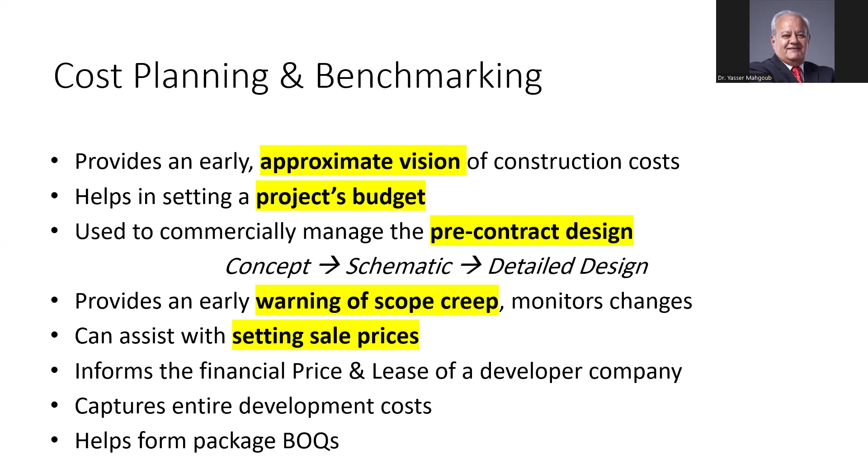It provides a warning of scope creep, monitors changes for the project. But it can also assist the real estate company to understand how to estimate the prices, the leasing contracts in the beginning of the project. So it is a very important number that you provide, and you have to understand how to work on this estimation.

So the first method we use is called benchmarking. Benchmarking means that you relate the cost of the project based on the examples of other projects. For example, when you design hospitals, the benchmarking would be the bed. It will be per bed. The hotel, it will be per key, the room key, not the number of occupants; it will be by the room key, the number of rooms.

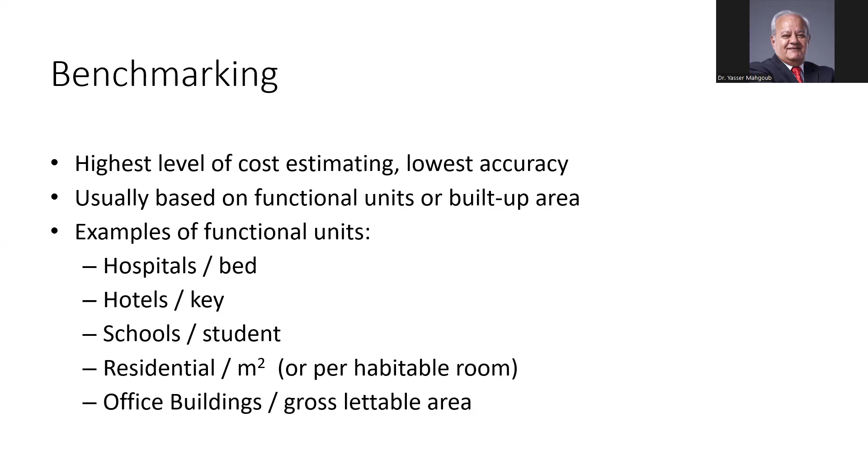For the schools, it is usually by student. For the residential projects, it's usually by meter square. For office buildings, it will be the gross lettable area, not the whole area, the lettable area. So if you have a project that has mixed functions, you have to estimate each function individually and provide an overall cost estimate.

The cost plan, as we progress, starts to have more accuracy. During the preliminary cost estimate, we expect 25 to 30% tolerance, so it is up or down 25 to 30%. During the concept plan, the accuracy will be more, so the tolerance will be plus or minus 15 to 25%. When you finish the schematic design, the first project, the tolerance will be less, 10 to 15%. When you have detailed plans and working drawings and bills of quantities, the estimate can be up or down 5 or 10%. So the accuracy increases as the design progresses.

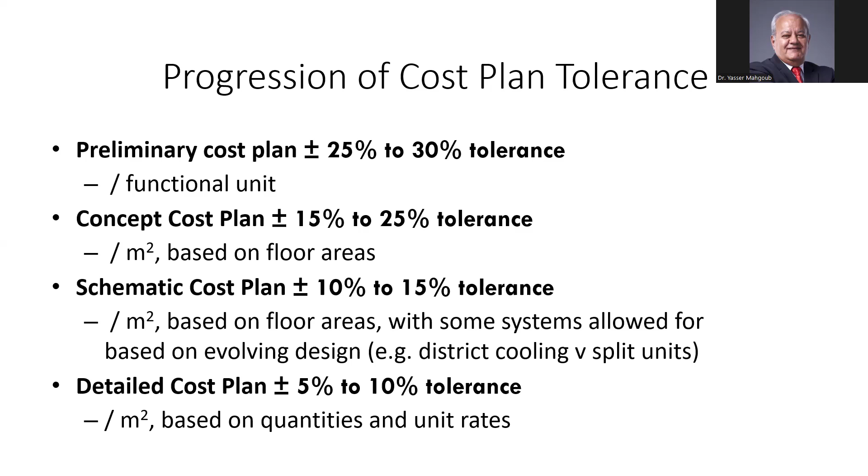The real cost estimate will be the cost provided by the contractor according to the tender documents. Yet, this might not be the final cost of the project because there might be variation orders or additional work required or obstructions during the construction that might delay or change the cost of some items. So even during the construction, the cost might continue to change according to the progress of work. So beginning with a high-level benchmark estimate by function is a good beginning that allows the architect and the owner to understand the scope of the cost.

You need to do some adjustments according to some major items like the geographical variation. If your project is in Siwa or in Aswan or in Hurghada, it would be different than projects in Cairo or Alexandria or major urban areas because the distance, the availability of materials, the availability of workmanship will affect the cost of your project. You need to provide accommodation for the workers. You need to provide water for the site work. You need to provide materials, transportation, and all that adds to the cost of the project.

So you need to think about a multiplier that is a function of the units in order to accommodate for the changes in the cost. You also need to add contingencies, like 10% contingency to the cost, in order to accommodate for any changes or delays.

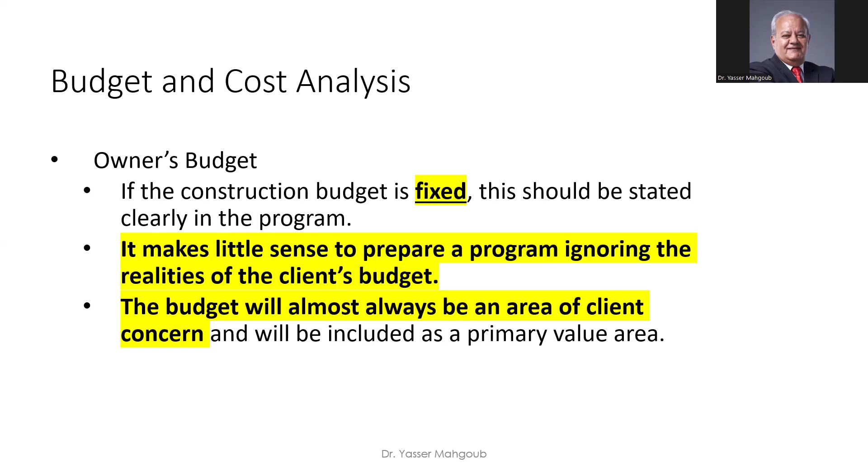Clients usually talk about the budget and the cost before they talk about the design. It's very critical for them to see that you are concerned about the budget and you have the knowledge to provide a good cost estimate for the project. Usually clients are over optimistic, and they think that with the little money they have, they can do everything. The architect's role is to correct this view and make them understand how much what they are asking for will actually cost, because there are many items that they don't understand and don't consider when they think about the budget.

Of course, the cost changes with the building type and the building quality. A 5-star hotel is very different than a 3-star hotel or a 1-star hotel. A resort on the coastal area is different than an upgrade of a project in a historical area, which is different than a neighborhood design in a desert or outside the city. So this will extremely impact the cost of the project.

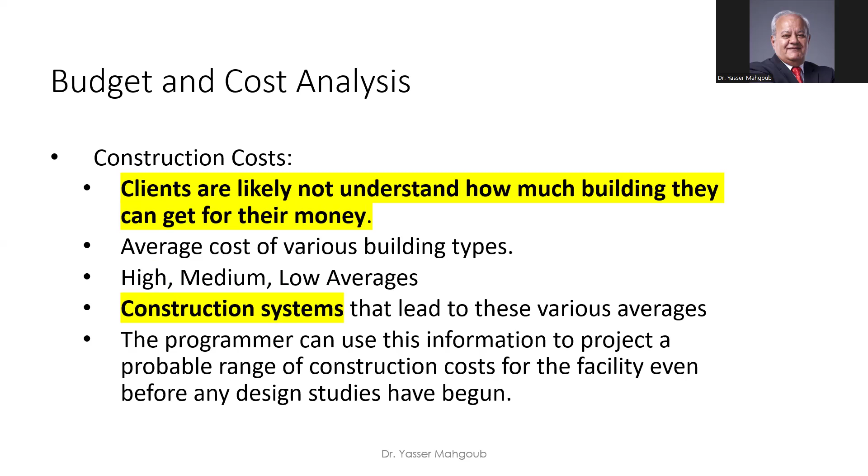And it's very wise to confront this issue from the beginning of the project, so you know if it's a go or no. Don't waste your time and effort on something that is not going to continue. So from the beginning, the client knows what the budget is. Do they accept it or not? Should I go ahead and start the program or not? So don't start without having all these variables clear to you from the very early stage.

And as I told you, the first question the client will ask you is how much will it cost? Not how will you design it, or what style are you using. They don't care much about this. This comes second after the cost. So having cost estimation skills through workshops, through training, through personal study is a very wise step.

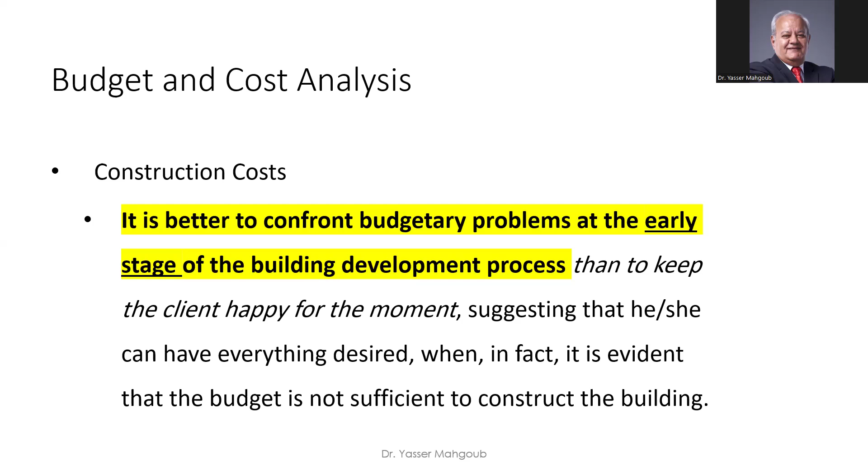We need to understand the difference between construction cost and project cost. The project cost is not the construction cost. The project cost is more than the construction cost. The construction cost is just one part of it. Other items include the land price, the cost of providing infrastructure, the cost of issuing permits, inspections, insurance. All these are parts of the project cost.

The soil tests, this has to be paid by the client. The contour lines, the topography, surveys, this has to be provided. Archaeological surveys, if you have some historical elements in the site, you need to make sure that they will not stop the work. The feasibility study is done by an economist. The lawyer who is going to review the contracts.

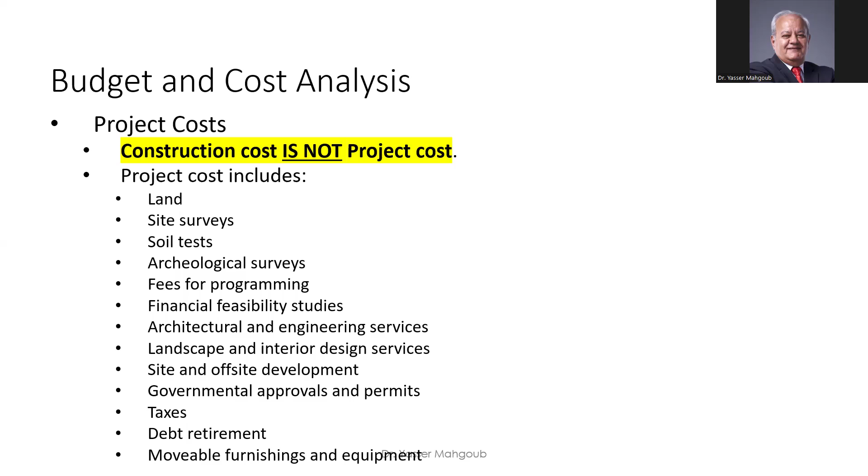So building cost is one part of the items. Fixed equipment, site development. So this is the total construction cost. Then you add to it the site acquisition, movable equipment, professional fees. Your fees are not part of the construction cost. They are part of the project cost.

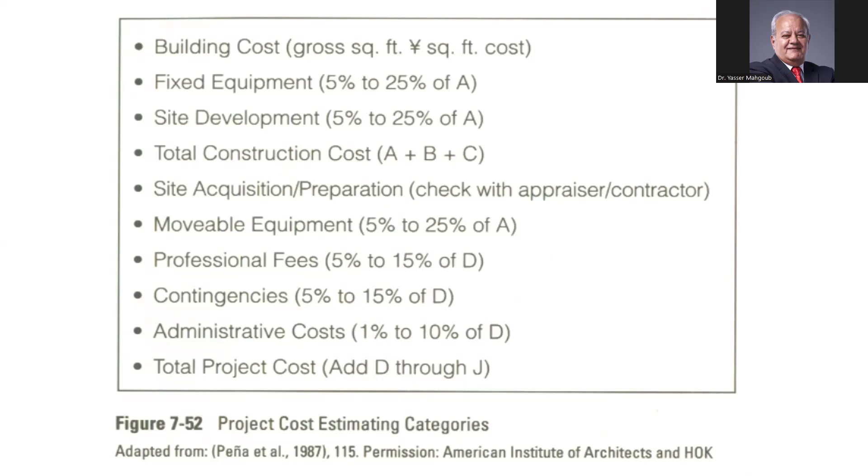Contingencies, 5 to 15%, depending on the site location and the type of the project. Administrative cost, if you are going to hire a project manager. So for the total project cost, you need to add all these items to the cost of the construction. This is not commonly understood by the client.

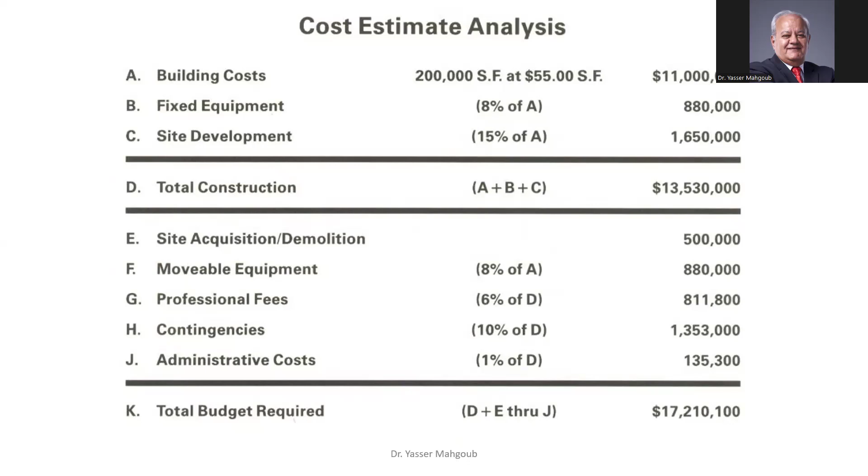So the architect must provide them with a cost estimate analysis: the building, the fixed equipment, and the total construction, and what will be added, and see the difference between the construction, 13 million, and the complete cost, which is 17 million.

One interesting item related to the design is that the shapes of your spaces affect the cost. Assume that you have a requirement in the program to provide 100 square meters for an item. The shape of the plan makes a big difference because the area might be the same, but the perimeter will be different. And the perimeter affects the cables, the electricity, and the skirting. Anything that is per meter run will be affected. Per square meter will not be affected.

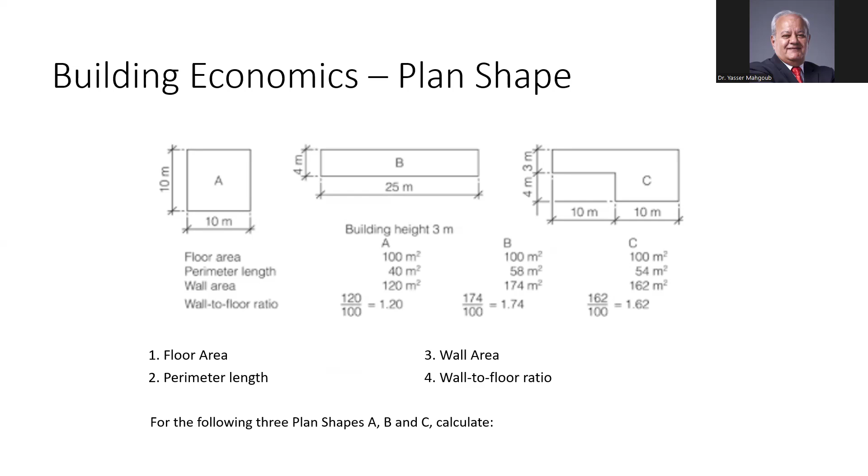The wall area will be different according to the shape. So the wall to floor ratio will be different according to the change of the shape. So this is also something that you need to consider in your design. Here we have a 1.2 ratio. B, we have a 1.74 ratio, and C is a 1.62 ratio. And that affects the cost of the materials, the painting, the cabling, everything that is related to the meter run. So the shape that you select for your design affects the cost of the project.

The height of the building is another major variable that affects the cost. The higher you go, you need to think about how materials will be moved from the ground level to the 30th floor. What types of cranes will you need? How will you get the concrete mixture to that 30th floor? How will you get the workers up and down? The safety requirements. So the higher the building, the more cost.

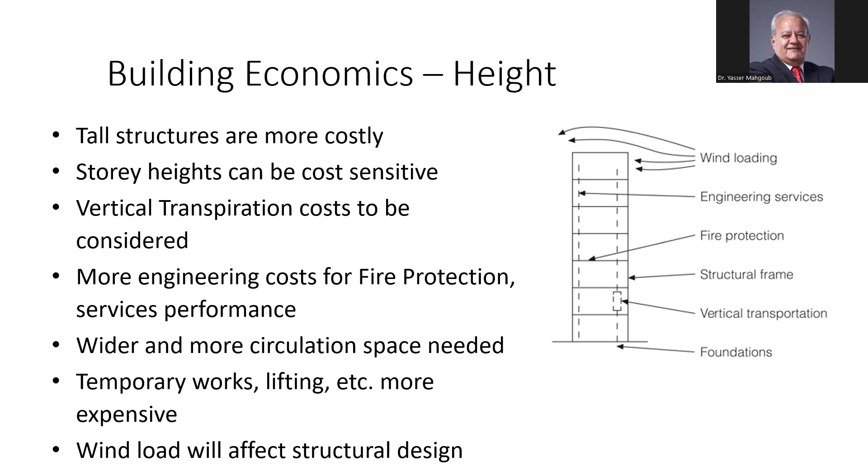You will need vertical transportation, more foundation, a stronger structural frame, fire protection, services, and also accommodate the wind loads that will affect the structural system itself. And that will increase the cost of the construction. So all design decisions affect the cost of the project.

So cost planning, as we said, has a set budget. You go through the concept, the schematic design, the detail, and the cost planning becomes more accurate as we proceed. To adjust the cost, sometimes we do value engineering.

Value engineering is a type of activity of workshops that involve the client, the architect, the contractor or subcontractors, if available, and the users, and they discuss ways to improve the quality while decreasing the cost. So it's not only targeting the decrease of cost, it targets keeping the quality or improving it while reducing the cost. And there are many places that offer value engineering certificates, and I think this is also a good step ahead to have these types of certificates.

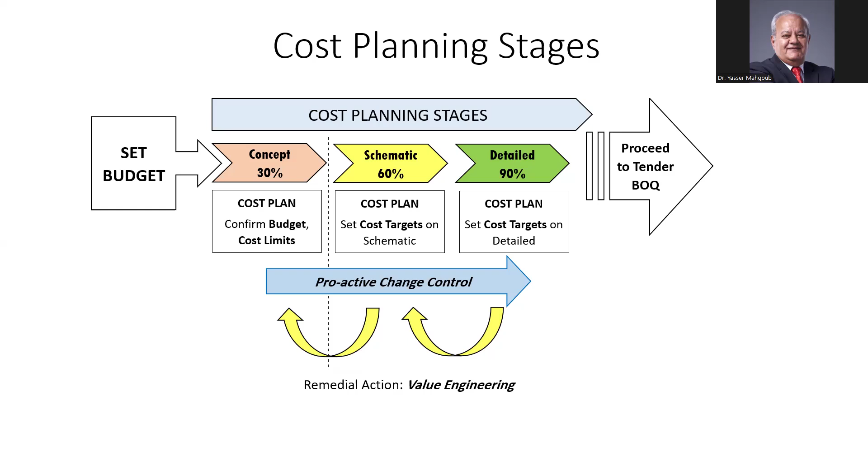So these are two areas that I think are very good for you to pursue in the future: value engineering and life cycle cost analysis. They are very important. They target the cost, they target the design, the materials, and they provide professional feedback, not subjective feedback. So the quantity surveyor also has a role when deciding on the quantities of the project, that the quantity and quality defined in the quantity surveying and the specifications affect the cost.

And this triangle shows the relationship between the quality, the time, and the cost of the project. They all work together according to the relationship of the triangle. Cost divided by quality and time. Quality by time equals cost, and so forth. So they are all related, and you need to consider. And from the beginning of the project, no money, no project. You have to make sure that the client has the required budget for the project.

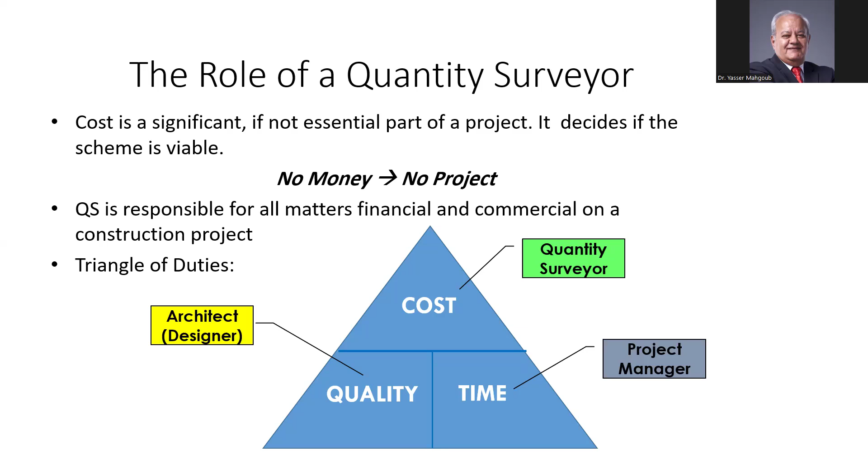So time is controlled by the project manager. Cost is controlled by the quantity surveyor, and quality is controlled by the architect. And the three of them must work together. You cannot decide everything alone. You have to work with others.

In conclusion of this cost management or cost estimation, benchmarking is very critical, and it is updated yearly. Every year, and sometimes every month, there is a newsletter about the benchmarking according to the company. Cost plans are approximate, not accurate. Accuracy improves as design develops. Building shape, size, and arrangement all affect cost. Height, room shapes, sizes, ceiling height, all these affect the cost greatly.

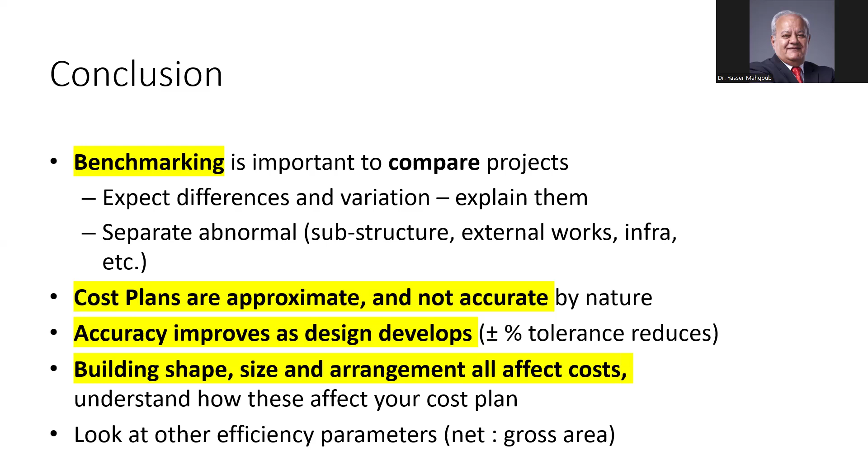That's why we encourage those of you who are interested to go in this track to get some professional training and certificates in value engineering, in life cycle cost analysis, in cost estimation, and project management. These are all important areas for you to consider. That is the end of our first lecture.

Now we will go to the next lecture. What? I sent the link. Accepted? I don't. Okay. Yes. Okay. Now we will go to our second lecture. Okay.

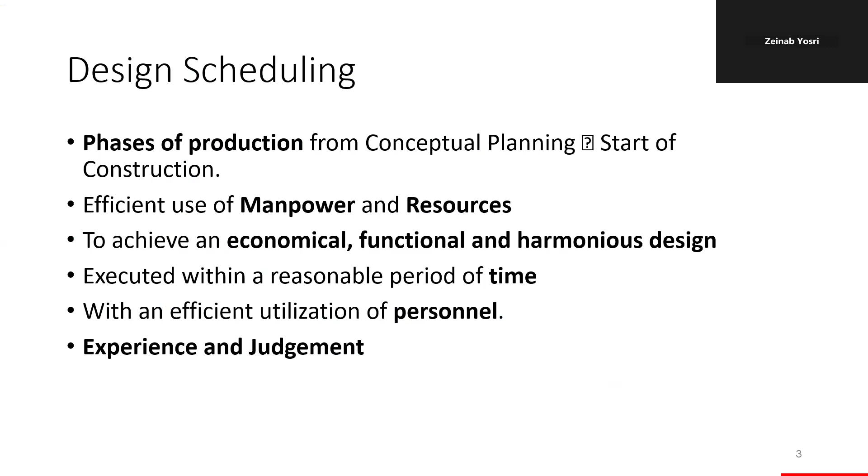The second lecture or topic of today will be on time and scheduling, which is very, very much related to the cost estimate topic, because time also affects the cost of the project due to inflation, due to delays in work and so forth. So design scheduling targets the phases of production from conceptual planning to the start of construction, and how to manage the manpower, the resources to achieve economical, functional, and harmonious design. This is, of course, the first part that you do in the design scheduling.

Schematic design is the most difficult to estimate because it can take 1 week, 1 month, or 6 months, depending on the approvals by the client and the discussions and the information provided. So it's very variable. It also depends on the size and complexity of the project, the quality and completeness, decision-making abilities. This is important. Do you have a personal client, a one-person client, or you have a committee, or you have to get approval from a council?

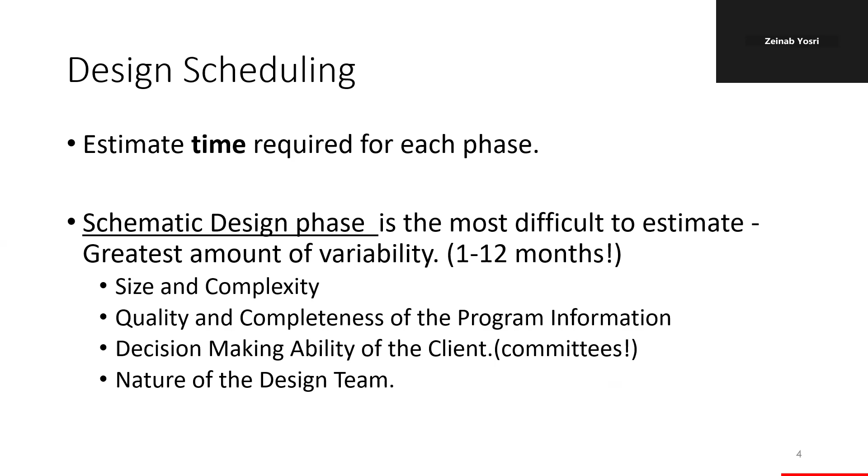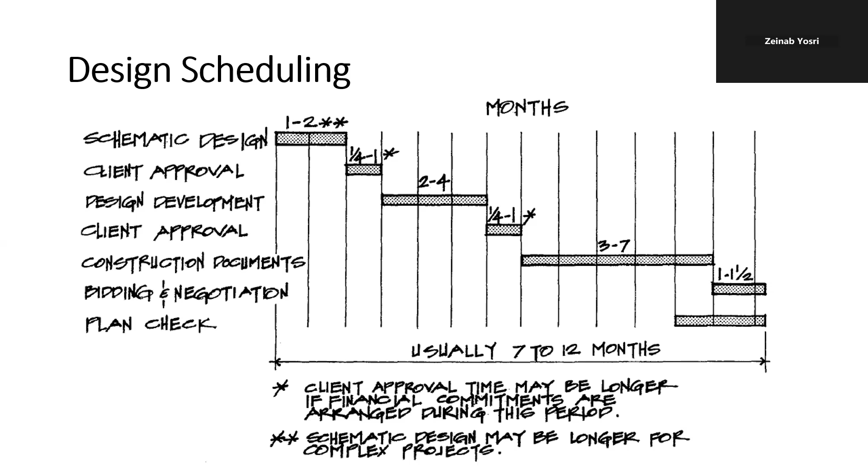And then the construction documents and the bidding and negotiation and the plan check to start the construction. Client approval time may be longer depending on the type of client that you have. But this is a general view of your design schedule.

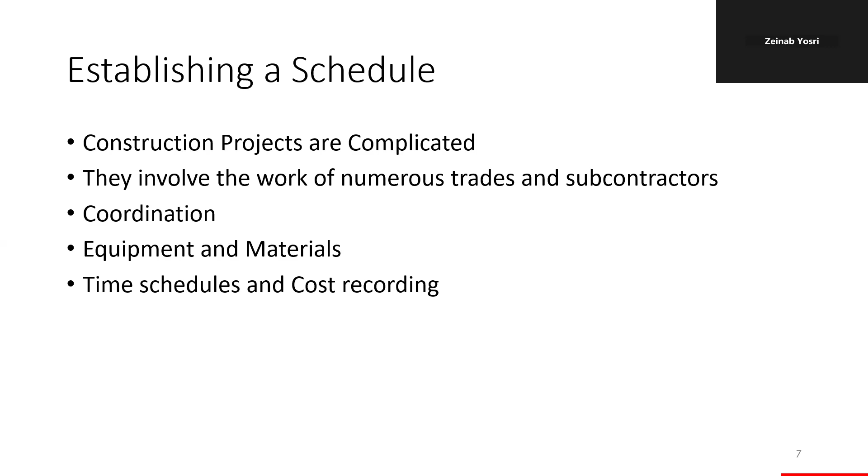Now we move to the construction scheduling, which is a bit different because it involves more items, more activities. We use, as we said last time, professional programs like Primavera or Microsoft Project to provide that based on CPM, or critical path method. It requires involvement of everyone: contractors, subcontractors, specializations, the furniture, the equipment, and so forth.

So basic considerations include the construction documents. Are they well done or poor? That might affect the construction time because you might need revisions and approvals back and forth. The architect engineer, more or less demanding. The subcontractors, they need to provide coordination. The contractor's organization, how big is the contractor's firm? How sophisticated, their previous experience, and so forth.

Material dealers, this is a major issue because your work might stop just because the material is not available. I don't have the tiles. I don't have the false ceiling. I don't have the projectors, so the work will stop. So I need to plan ahead and make my orders ahead of time, especially for the large items, the large materials.

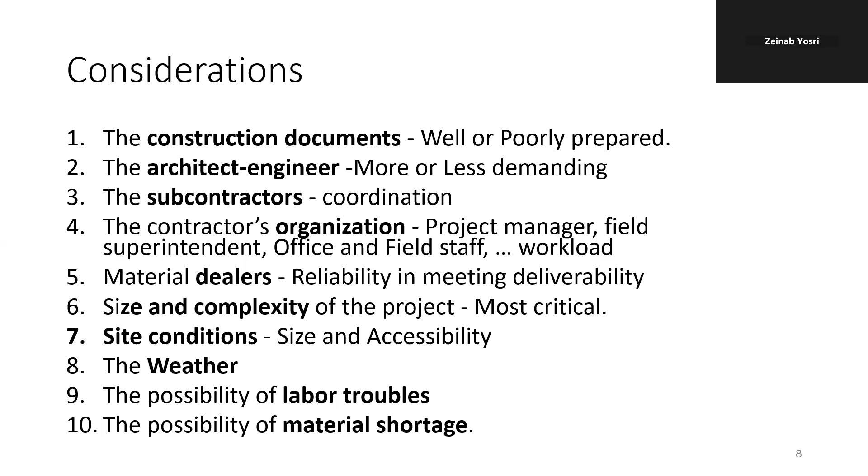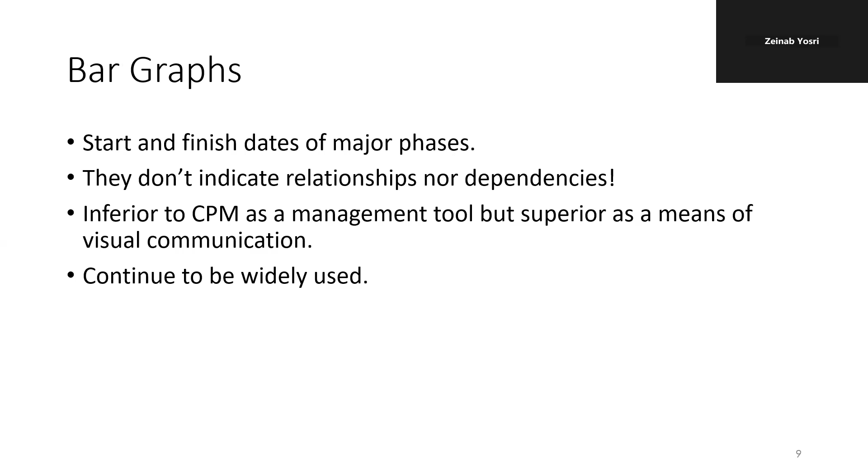So the bar graph, as we said, is the easiest type. Start and finish dates of major phases. They don't indicate relationships, so they require updates all the time. You might have one bar chart and you are updating it based on the actual progress. The CPM, the critical path method, is an interactive, intelligent scheduling that accommodates these changes automatically with any dependent activity. And it's widely used now in the market.

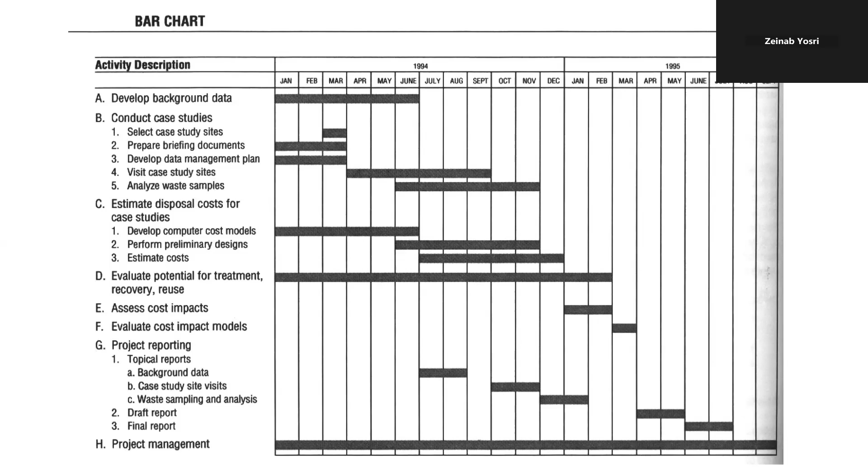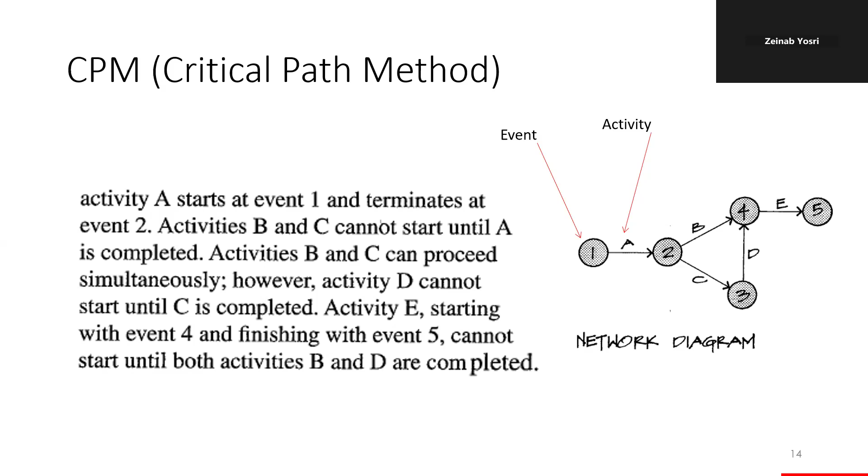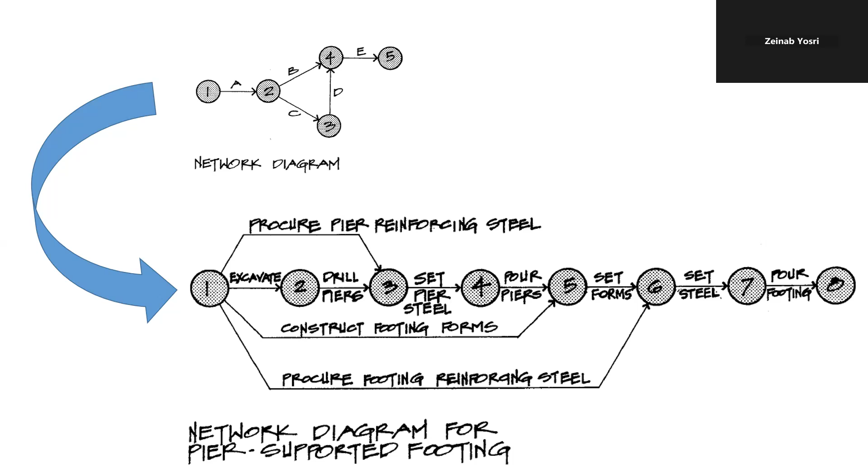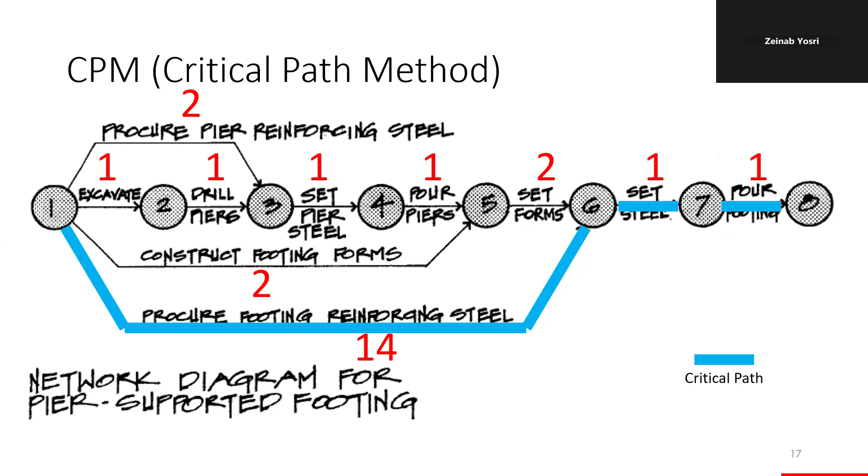So the critical path, some people get confused that the critical path is the shortest path. No, it is the longest path, because there are certain items that I cannot do unless the previous items are finished. So this is how it shows in the program. Each item is linked to the elements that it relates to. I cannot bring the painter before I finish the door. I don't need to bring the glass if the door is not installed. So all of these are related to each other. So that is applied to all activities in the project.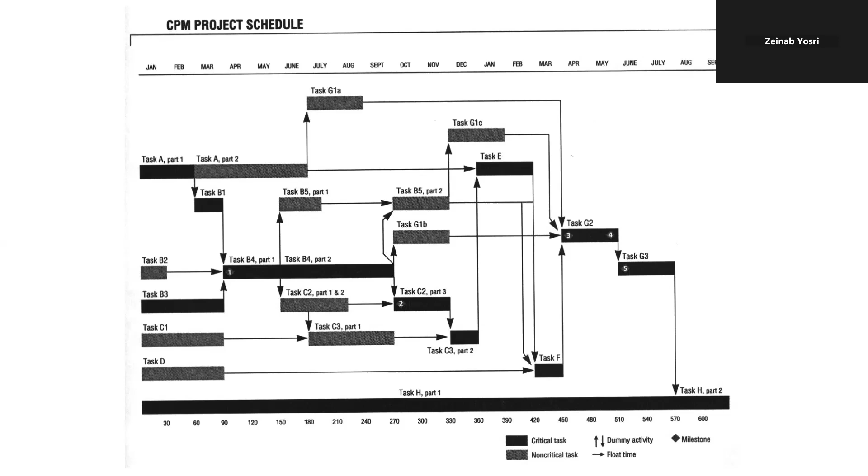And if there are changes in any time or resources or material, you go change it in the project software, and it changes everything automatically. It's very important for fast-track scheduling. Fast-track delivery requires very close scheduling and monitoring by the architect, the engineers, the client, and the contractor. And the CPM can be shared on the internet by everyone involved. And it can also include on-site cameras that monitor the actual progress of work.

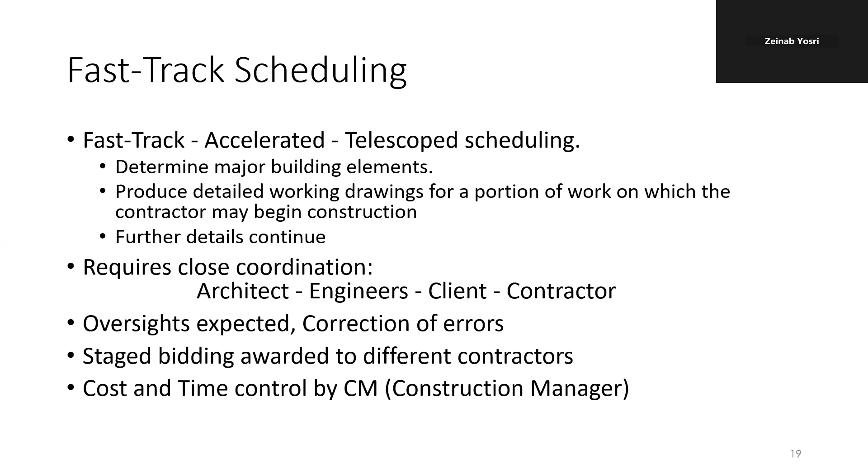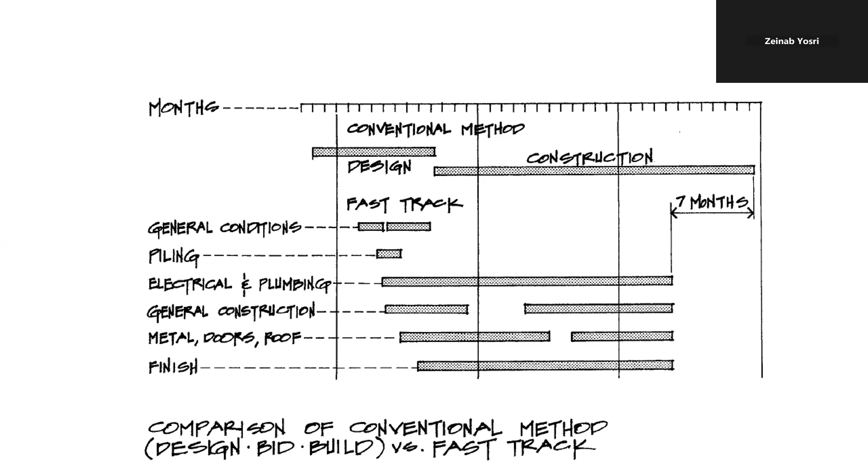So in your office or through your mobile, you can witness the pouring of concrete, the installation of materials, and you adjust the schedule accordingly. Is this item done or not? Is it delayed? Delayed for what? And so forth. So it requires close observation to correct errors frequently. Fast track also requires a special type of scheduling that overlaps the design and the construction, so that I can improve the quality by shortening the time.

So from the beginning of the project, you have to start establishing the schedule, use CPM, think about the floating items that can change in time, follow the project calendar, the vacation times, expected behaviors of labor and construction, expected weather conditions, snow, ice, rain, sandstorms, extreme heat, like in the Gulf area. They have to consider the hot months of June, July, August. If temperature reaches 50 degrees, then the work stops by law. So you have to consider that there might be some delays during that period.

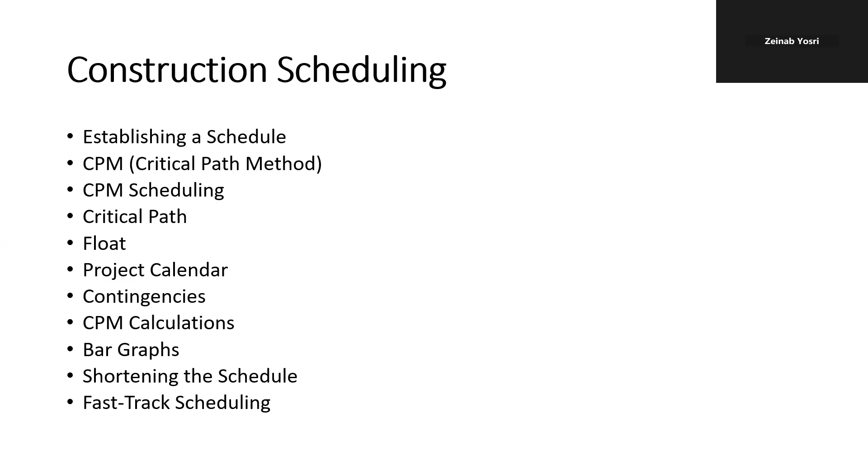In the US and Europe and places where they have snow, they have to consider snow time or tornado season. All these can affect the project. Fabrication times should be considered. If you are requesting tables and chairs, they will not be ready to purchase. You need to order, and you need to estimate how much time do I need to fabricate 1,000 tables and 2,000 chairs for the university. So I need to plan ahead in order to finish on time.

A sequence of construction trades. This is a major understanding for you, so that's why gaining practical experience on the site is very important to be a good designer and a good manager, so that you see things by yourself and see how long it takes for the plumbing to be installed, for the electricity to be installed, for the air conditioning to be installed, and how this will affect the scheduling.

Okay, that's the end of this topic. And now we will move to the last topic of today, which is the end part of our work.

Okay. The last items that we need to consider is your relationship with the contractor through the shop drawings, site visits, and project completion. First, shop drawings. Shop drawings, as we said, are drawings developed by the contractor based on your working drawings. Working drawings that are 1 to 100 are not sufficient for construction. They're only guiding the contractor.

They take these drawings and develop shop drawings for each item with larger scale, can reach 1 to 10, 1 to 5, 1 to 1, whatever it takes to provide detailed drawings that we call shop drawings. They also have to provide samples of materials, and the architect must approve the samples. You must sign with a marker the samples that you approve. They will provide you with samples of colors you have to approve in writing.

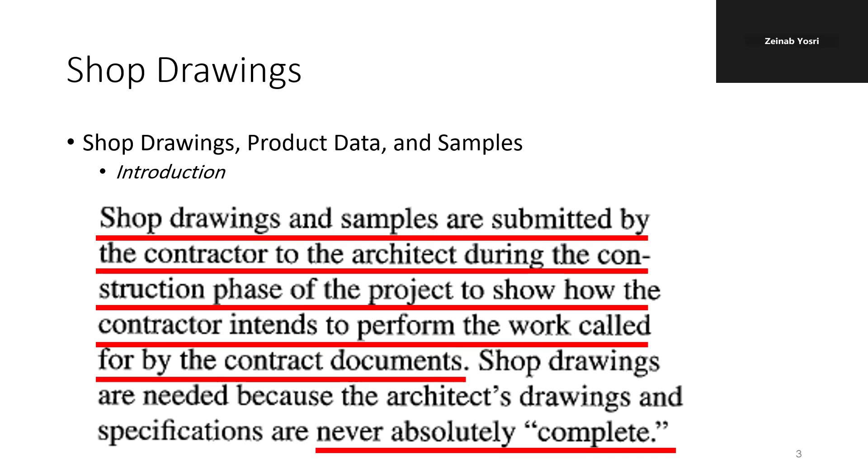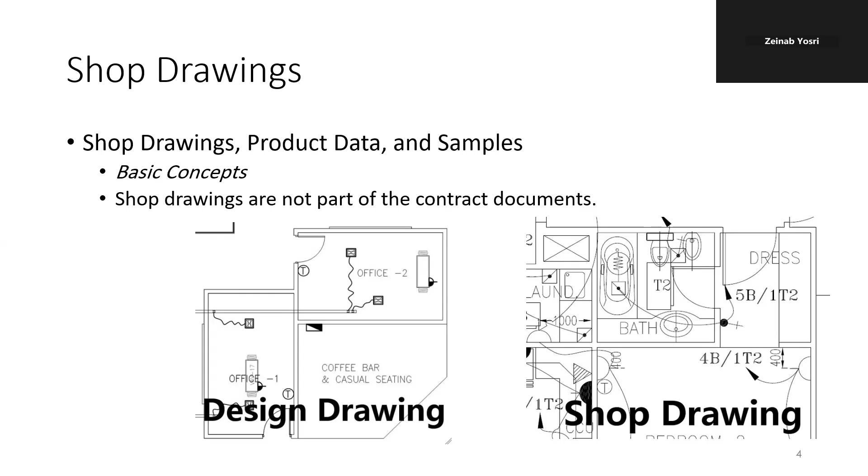Okay? So all these are submitted by the contractor during construction, and the architect is required to review, make sure that they comply with the original working drawings, sign, and send back to the contractor within few days. So you have to finish them quickly, otherwise the contractor will request extension of time. So the shop drawings will identify exactly what each item will be, where each item will be installed, the tiles, the materials, the fixed furniture, and the details of them, and so forth.

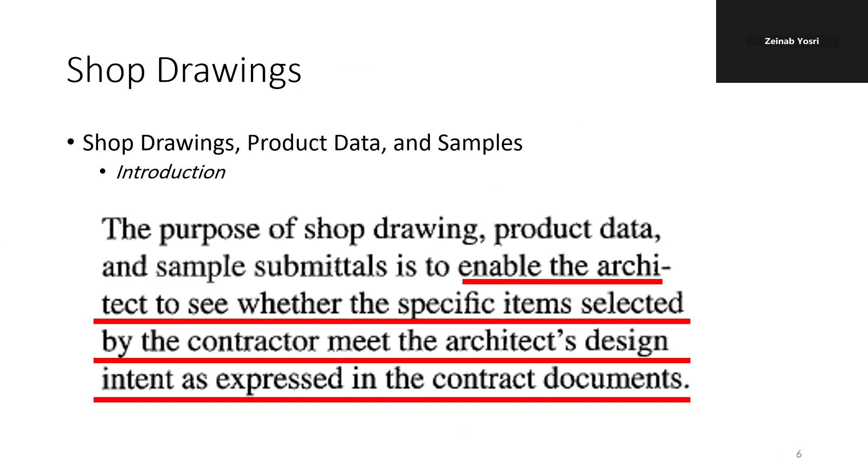Of course, these drawings and samples enable the architect to see whether the items selected by the contractor meet the design intention, and make sure that they follow the contract documents provided to the client at the beginning of the construction. So the contractor must call the architect's attention to deviations or problems in the site construction that are different than the construction documents. And the architect must give specific written, not verbal, approvals. Everything must be in writing, because usually projects end up in court.

The contractor asks for extension of time or extra money or variation order, and most of the time there are certain disagreements and problems at the end of the project. So protect yourself by having everything signed and documented. Keep records of every paper you signed. Make a copy, and not digital, a photocopy. And keep good records of your work. Do not allow the contractor to deviate from the requirements of the contract documents.

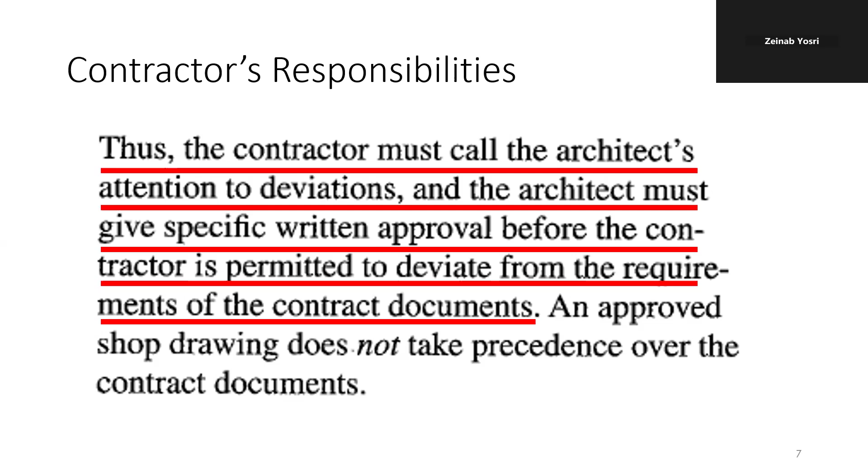Record keeping, as I said, is very important. You have to keep records of every event or meeting or document that you sign and send to the contractor, with the dates received, the date returned, the action approved, corrected, revised, refused, and retain copies of all submittals. This is very important to protect your future. Within a reasonable time, 10 working days or 2 weeks maximum, return the documents. And if there are changes ordered, they must be processed through formal requests.

You don't just go to the site and say, no, close this door and move it to the middle. You cannot do that. This is a change order. If it's here in the drawings, then it must be here in the drawings, unless there is a change order.

Site visits. Site visits are part of the role of the architect to make sure that the project is progressing according to the contract documents, and the quality of work is acceptable and to the standards. And site visits are also recorded through written reports. So you need to start by having pre-bid meetings with the contractors, a pre-construction meeting with the selected contractor, and during construction, there are frequent meetings.

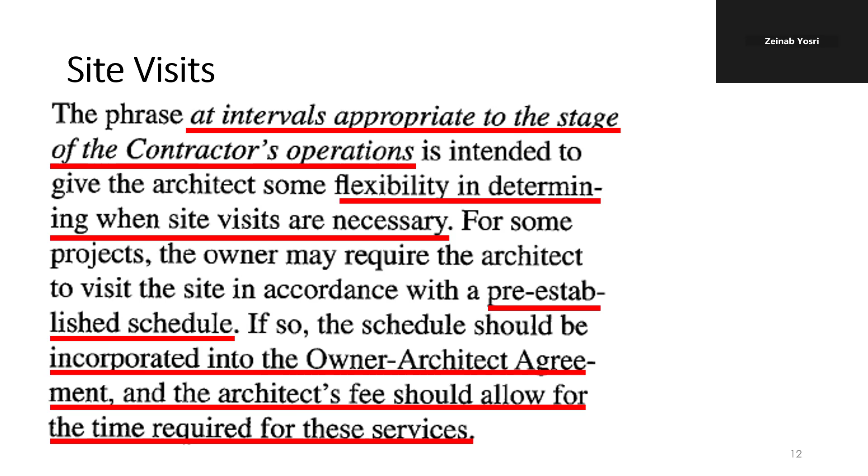During construction, you are required to visit the site, and every visit, you have to write a report. What did you see? What did you approve? What you don't approve, and so forth. You can have what we call interval meetings. These are meetings that are done on intervals, or you can have a pre-established schedule for the meetings, or you can have continuous presence in the site through representatives and junior architects.

So you need to advise the owner if the contractor is performing the work in accordance with the contract documents. Meetings: participate in all the meetings, documentation of the meetings, and this might reduce the possibility of misunderstandings. Everything should be recorded. Everything should be shared online. You can have the documents through a network with the contractor, so you can go back to any document or any drawing at any time. And there are many programs and platforms that provide that.

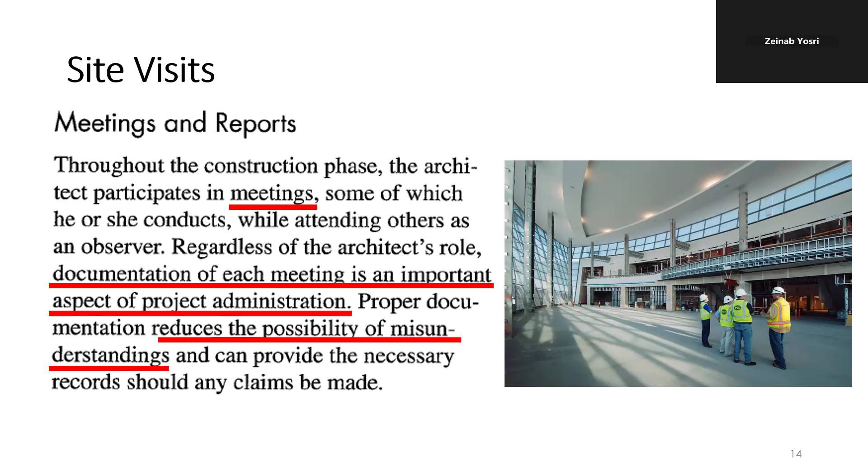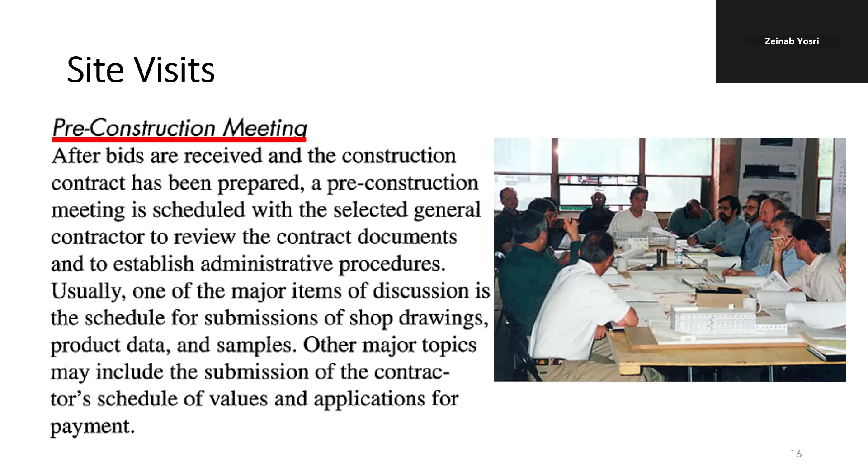The pre-bid meeting is very important. You meet with all the contractors that are interested in the bid and clarify any issues regarding drawings, specifications, bills of quantities. And there is a pre-construction meeting with the selected contractor. And there are frequent meetings during construction and site visits with the contractor.

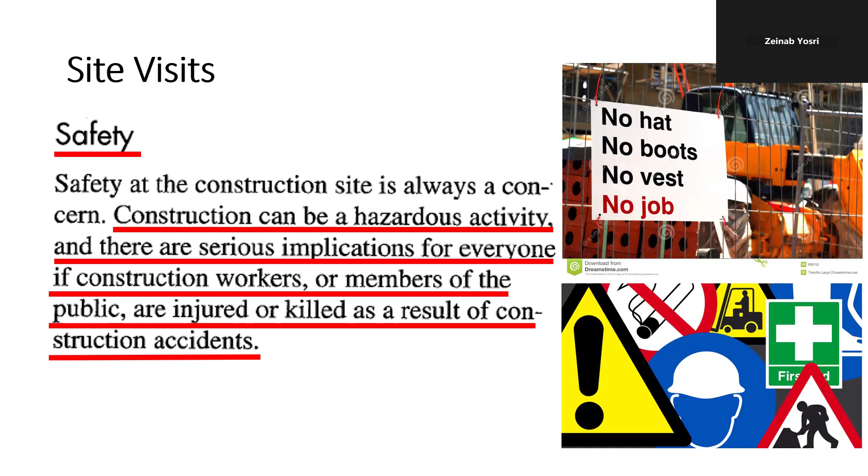Safety, as they say, is number one in sites. You have to make sure that the site is safe for the contractor's workers, for the passers-by, for the community, for the cars. Any accident will cause a lot of damage to the project, to the architect, to the contractor, and everyone involved. That's why we always say safety first.

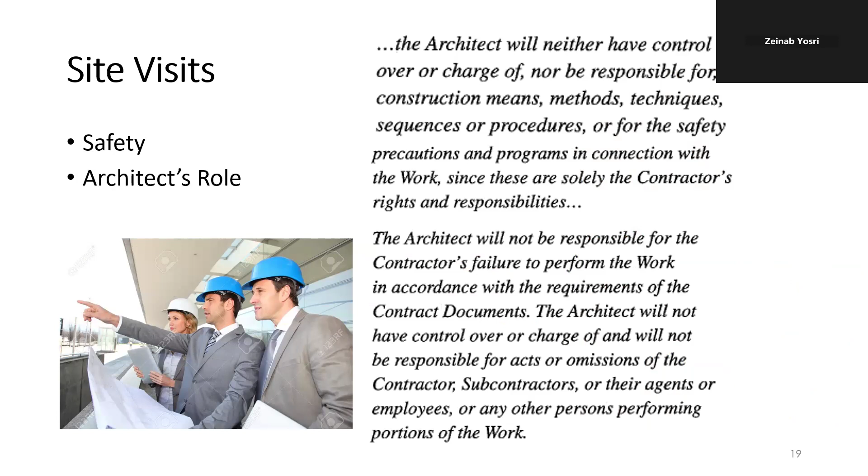You have to wear the gear, helmets, boots, appropriate clothes. You have to have professional induction into the site. Don't let anyone just go and move through the site. And if you find any problems or observations that are dangerous, you have to inform the owner immediately in writing, and don't ignore, because that might result in the loss of life of someone.

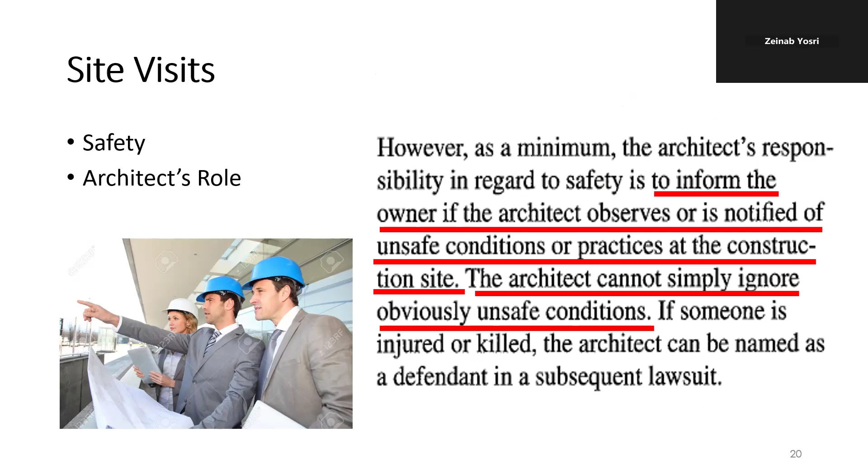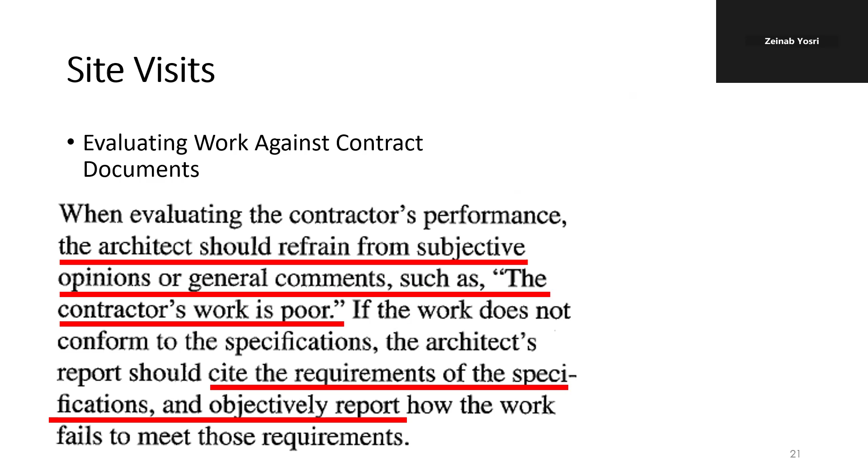The architect should refrain from subjective opinions. Any opinion regarding the project must be based on evidence and drawings, specifications, bills of quantities. Don't just say, I don't like this door, change it. This is not acceptable. You have to say that this does not comply with the specifications or the drawings.

Of course, there will be claims and disputes between the owner and the contractor, and the client has a role to look into this regarding cost, time delays, conditions, and the architect should provide professional opinion regarding this.

Rejection of work if it does not comply with the requirements of the contract documents. This has to be done through the owner. You inform the owner that the work is not acceptable, and the owner is the only one who can reject or stop the work. Don't just go to the site and say, no, stop the work. You cannot do that. The contractor will not listen to you. You have to inform the owner, and he's the only one who can do that.

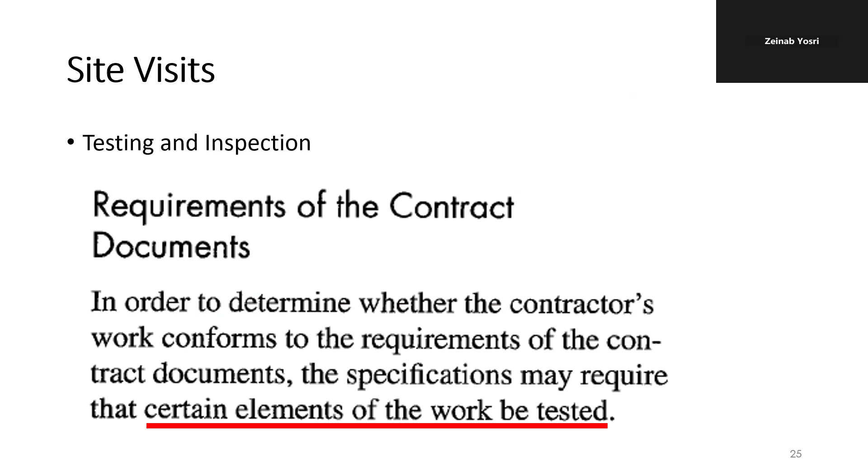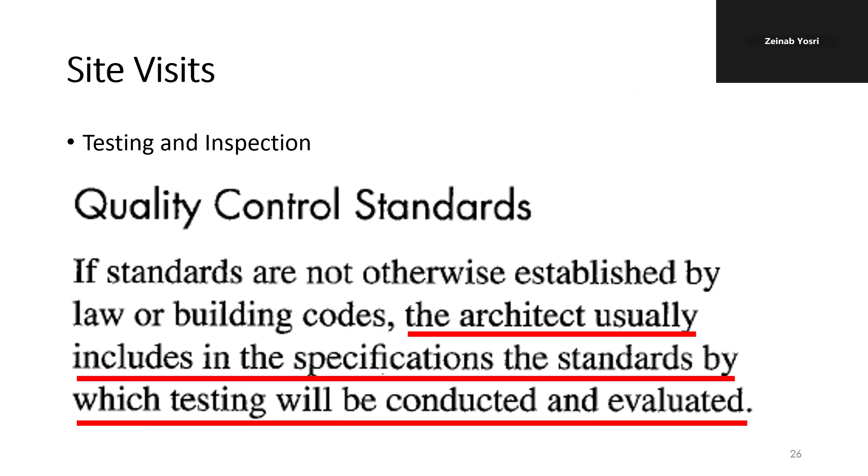Some tests are required in sites, concrete tests, material tests. They have to be performed in professional laboratories by professionals who provide reports about the quality of concrete, the quality of paint, and other inspections of machines, and so forth.

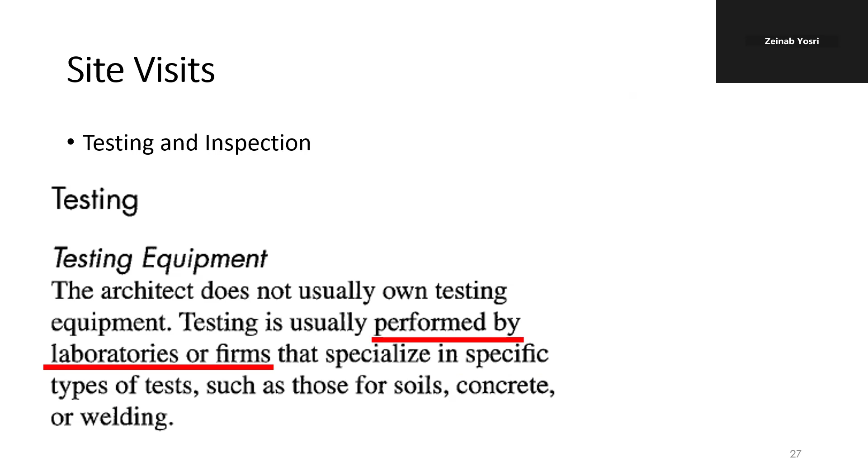So many universities have approved laboratories to provide reports on material testing, especially concrete mixtures. They have to be tested for all the concrete before pouring, and welding. If you have steel construction, all the welding must be tested and approved.

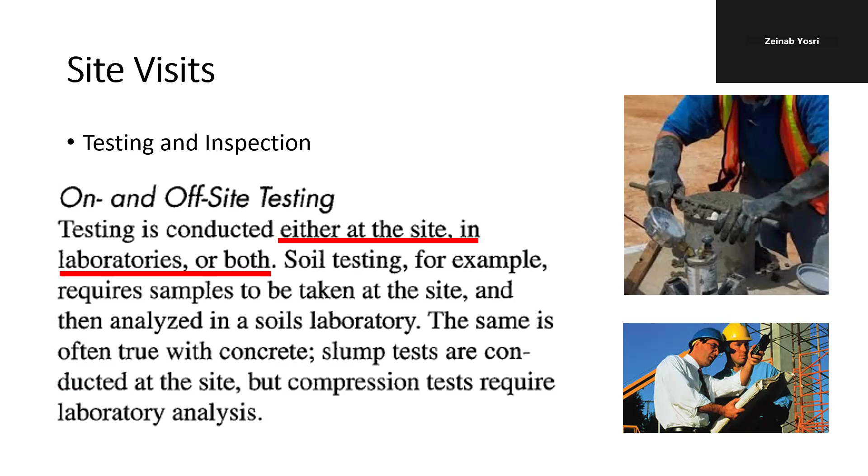If you go to the site, you see that they may take a sample of the concrete and put it in a conical shape, and then they tilt it upside down and see what is the amount that it will set and change its shape. So everything must be done properly.

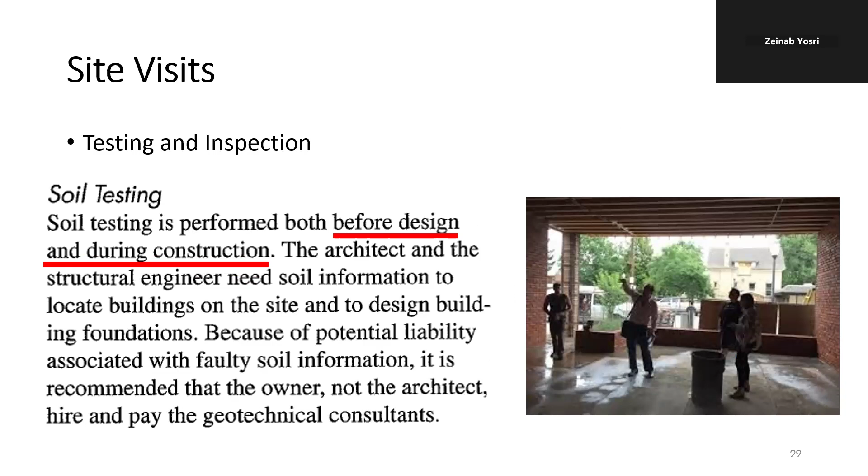Soil tests are also sometimes required during construction, and you might find that the original soil tests were not enough. You might need more. Concrete and welding are usually tested, and after you finish all that, there is project completion. The project is complete. This is a very rewarding time.

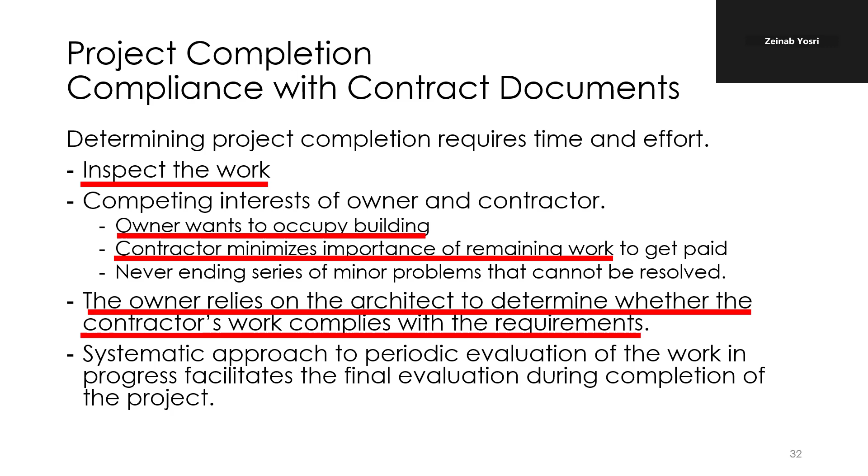You have to inspect the work completely, make sure that it is suitable for occupancy by the client. Of course, the owner wants to occupy it quickly, and the contractor wants to minimize any remaining work to leave the site. And this is the job of the architect, to make sure that everything is complying with the construction documents.

So there might be a stage called substantial completion, where the project is almost finished for the owner to start using it. But then there will be final completion, that all types of work are finished, and the certificates of payments are issued to the contractors, and their letter of insurance is returned, and everything is set.

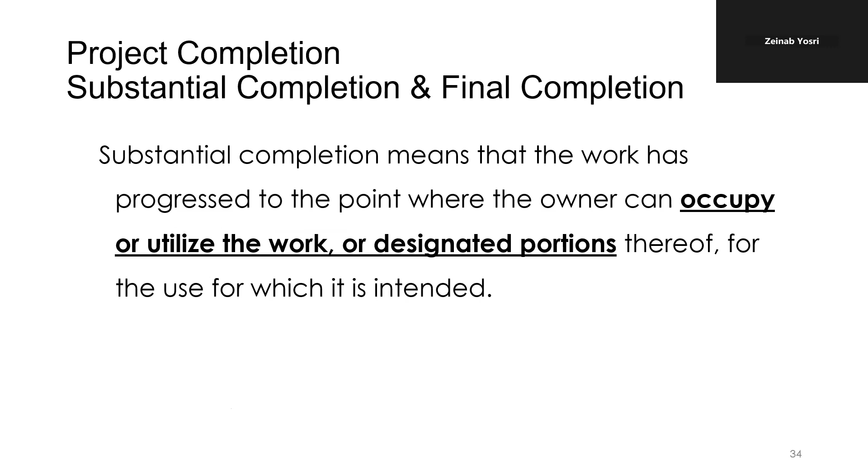So substantial completion means that the project can be occupied partially or fully by the owner, but the architect must provide what we call a punch list. Go through the project. This wall needs to be repainted. This tile needs to be changed. Everything that you see not complying with the contract documents, you must provide as a punch list and send it to the contractor.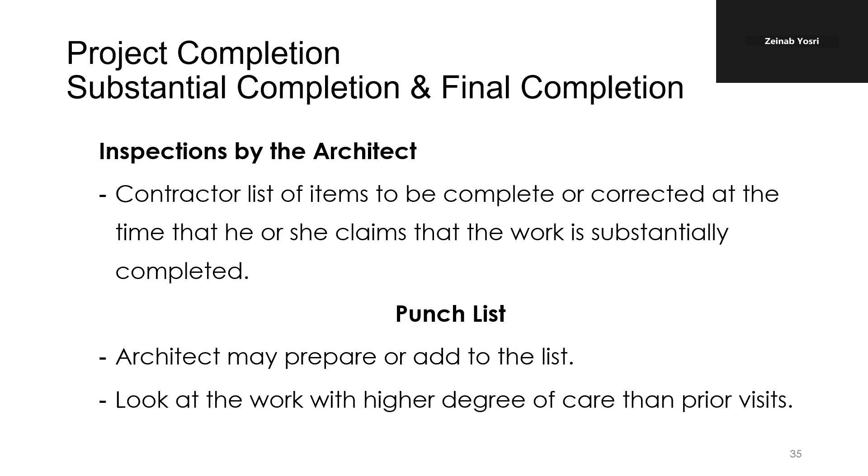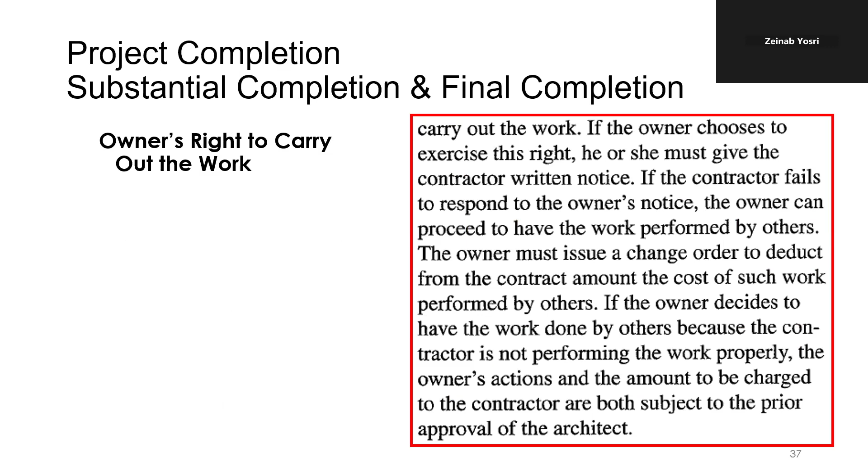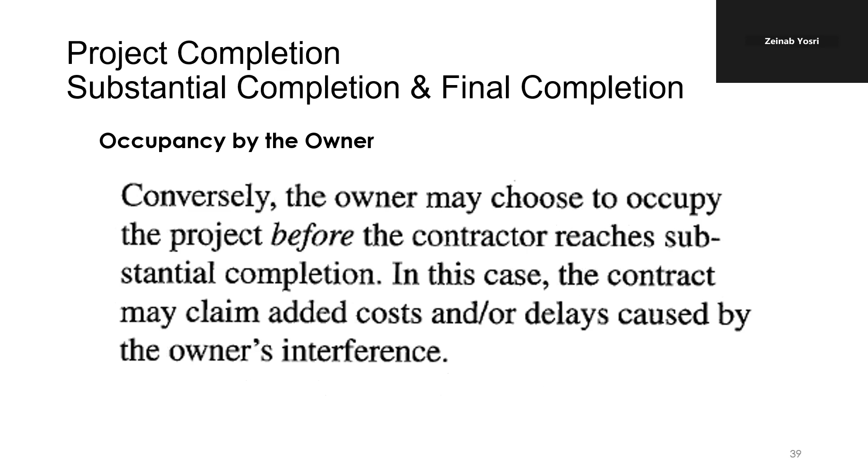The contractor must clean up the site and facilities before leaving. And if the owner chooses to keep the contractor for other work, they can do that. And then the occupants come in and start to use the project on their own, partially or completely. So the final payment is paid to the contractor, if everything is okay, and then it's the end of the project.

And thank you very much, and I wish you all an excellent future in the profession. And you have all roads open. You have many skills that you need to advance and learn more.

What you have learned in the university is just a starting point. You are starting to learn. This is what your certificate will indicate. It's not the end of learning. This is the beginning of learning and the beginning of your career.